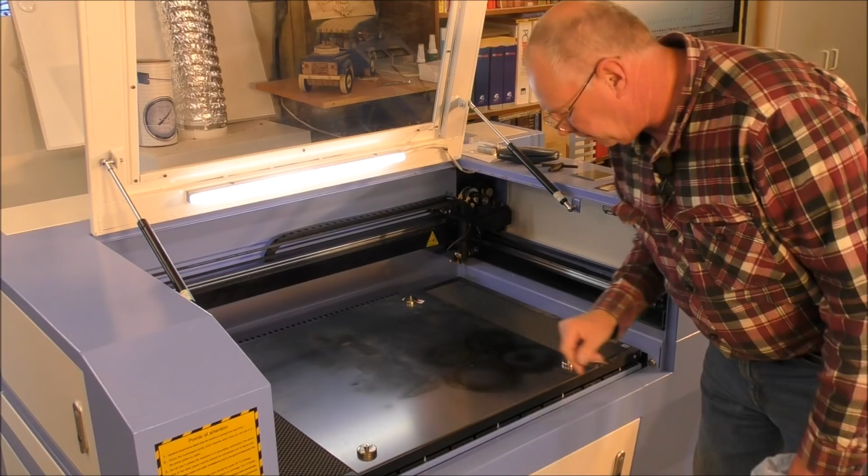You remember in the last video I showed you and explained to you why I have this black mild steel on here. Well, this is the reason. All this tar or residue that is left over from the burning or evaporation of the MDF, most of it's gone on here and condensed. Now if you didn't have this, it would either condense on your honeycomb, or it would be carried off into your filters, which gives you more work to do and added cost.

So you can clean it off very simply like this. Acetone. It's very gooey, horrible stuff too. But acetone cleans it off quite well. One thing using acetone, you've got to give sufficient time for the acetone to evaporate completely out of your machine. Otherwise, you could have an explosion because the laser can ignite the fumes.

So the first thing we need to do is switch the laser on and allow it to home itself, because we're going to then drive the Z down, put the fourth axis on, and then disconnect the Y and reposition it manually over top of the fourth axis. We'll then set the work offset or the work 0 point of the X, Y and Z on the work on the fourth axis. So it's automatically set the home position, so now I can drive the Z down and disconnect the Y.

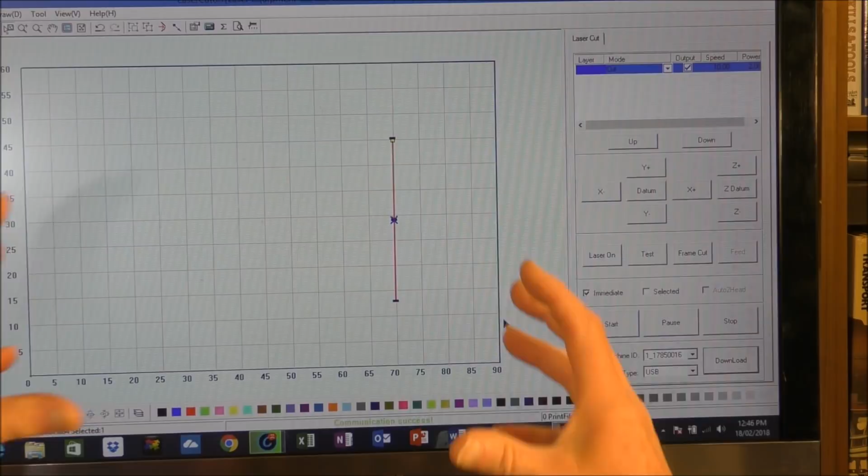So what I've done now, we have to configure the fourth axis to this machine. So I've drawn a single line that's 315 millimeters in length. That is the circumference around our vase. So we need to now match the driver to the stepper motor on the fourth axis. This is how we do this. You draw a line of the length of the circumference around the object that you want to etch, and I've set it to a speed of 10 millimeters per second, nice and slow.

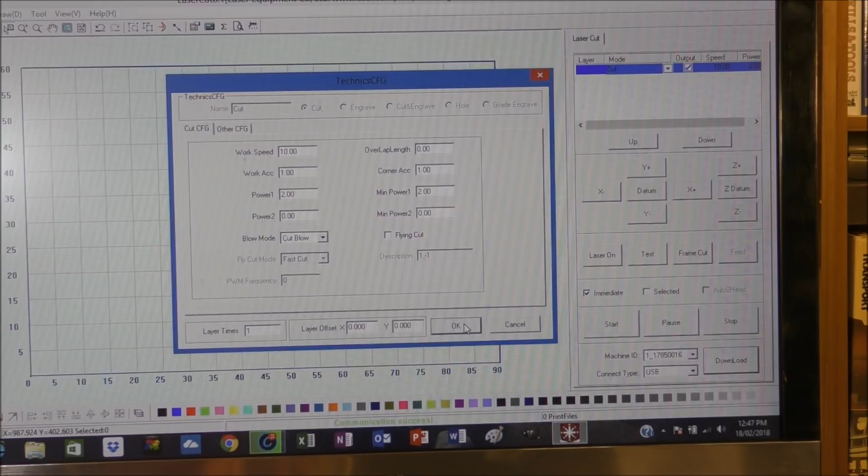So I set this down to 1%, 1%, 2%, 2%. I know the laser isn't going to fire, because we don't want the laser to fire. I'm going to OK that. And I'm going to upload that now to the laser. And there it is. So now we will run that file, and I'll put a marker on here to see how far the surface actually turns, to give us some indication of how much we need to alter this. So I'll just run that code now.

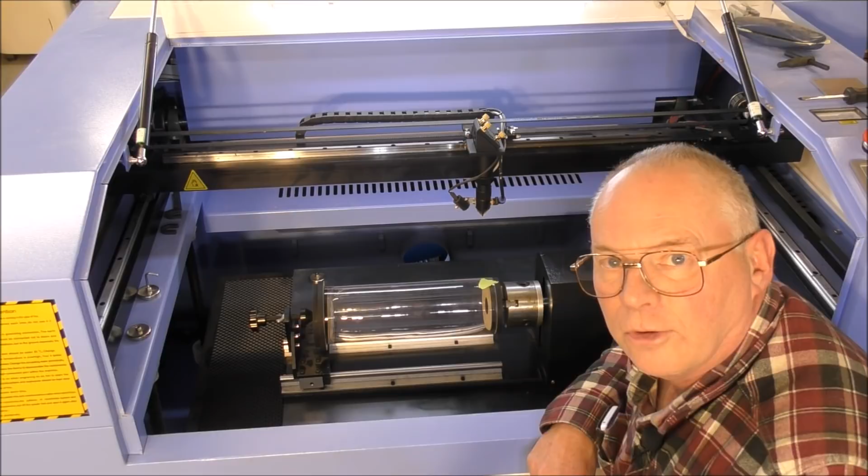3, 4. So as you saw, that was 4 1/3 turns, so it's way out. So whatever steps it is set at the moment, we have to be somewhere at 1/4 or just less of that.

Okay, now to alter any parameters within this program, which is the controlling mechanism for the laser, you come up to here, machine config, axes, y-axis, and this is the standard setting. Now take a photograph of this. In fact, take a photograph of all these settings, because you may need them in the future. So what we're going to do, double click. This lower figure is the one that we're interested in. Now this isn't going to be correct, but it's going to be a lot closer than what it is at the moment.

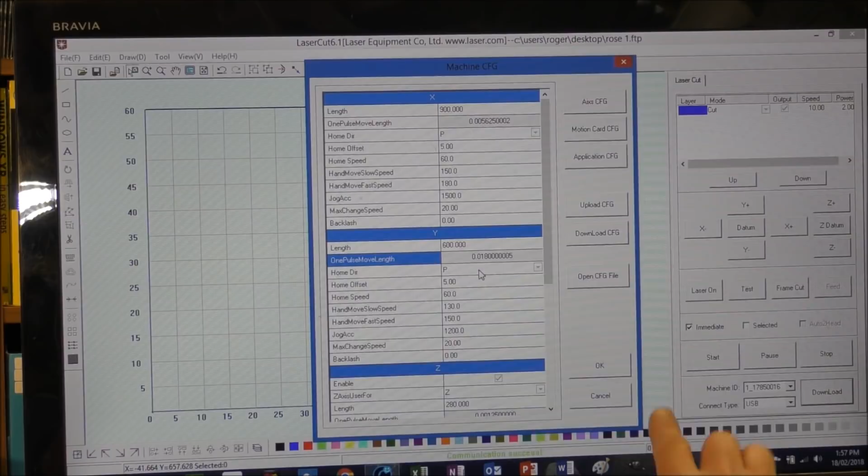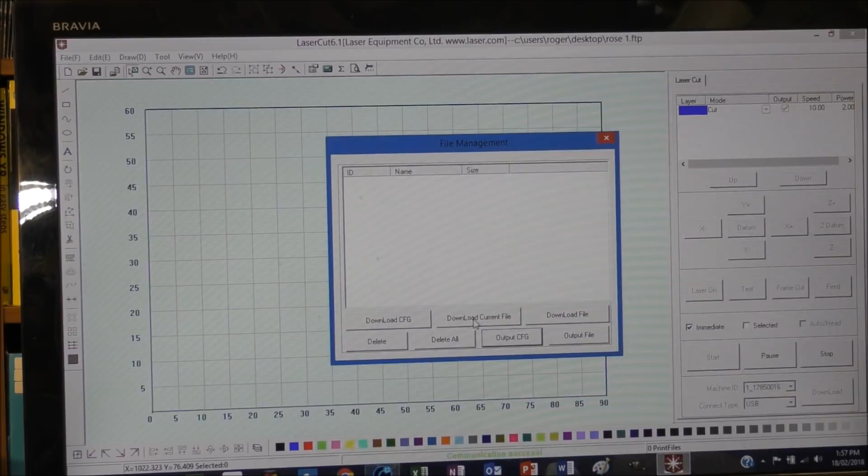I'm going to set this at 2000 pulses or steps, and press OK. Then you have to press OK down here, and also press OK here, and get out of this. Then double click and recalculate. Then send it to the machine. Okay, so now we'll go back to the machine and see what's happened now with the 4th axis.

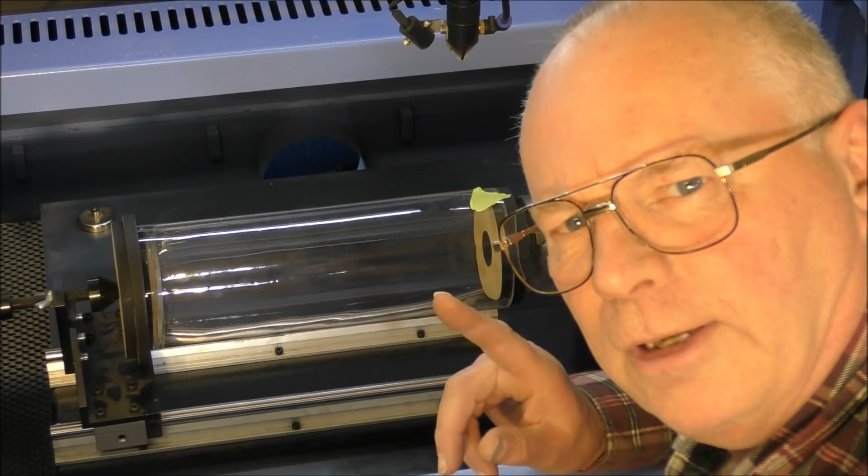Okay, so let's see now how many turns. That was about 1 1/3, or just over. So we know we've got to come down to about 1500 steps. That'll be pretty close, I think.

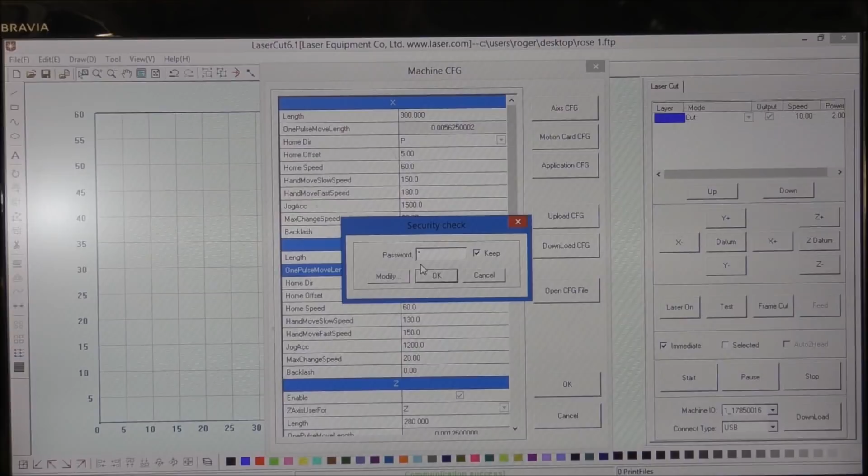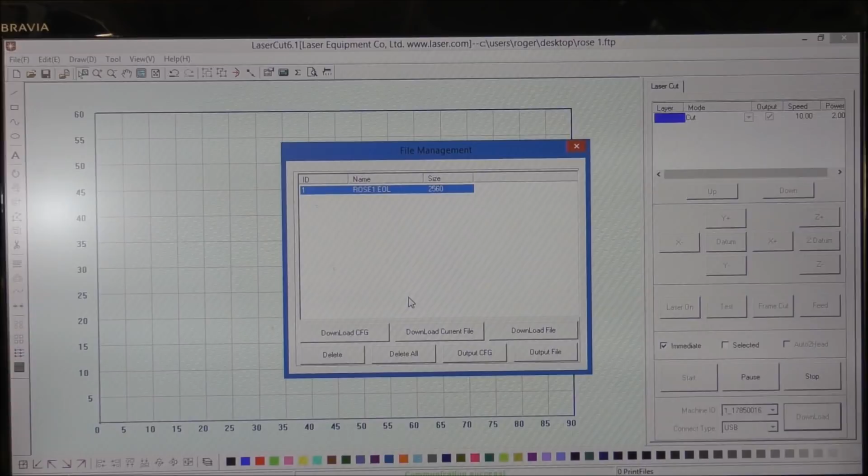Okay, so it's back into File, Machine Config, Axes, reopen this. Now I'm going to put 1500 here because, roughly working it out in my head, that's going to be pretty close, I think. OK, OK, OK, get out of that, double click and recalculate. So you can do this relatively quickly, it's not a big palaver to go through. Load it to the machine, yes. Now we'll go back to the 4th axis and recheck it. Okay, so here we go.

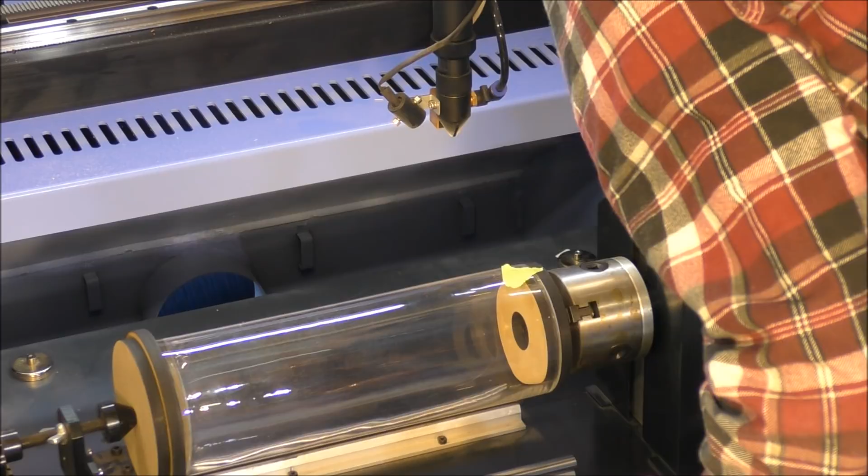Let's just recheck that again a bit closer. And that's pretty well perfect. And that's all you have to do. Just remember to take a photograph or jot it down on a bit of paper what the original readings were.

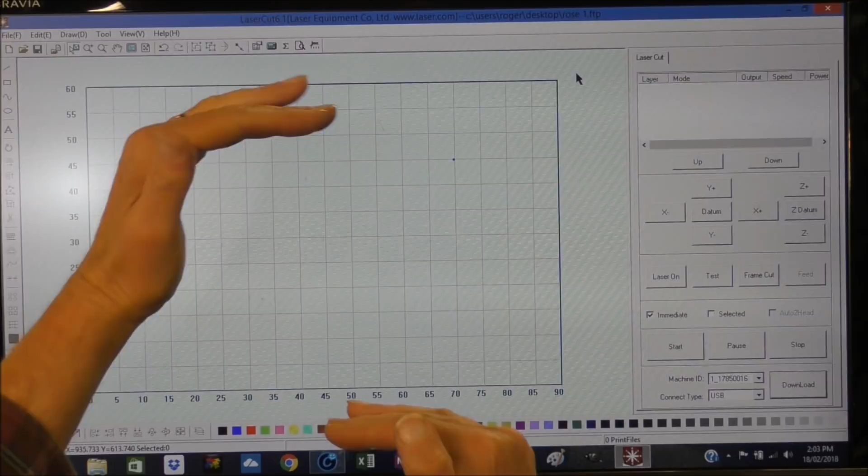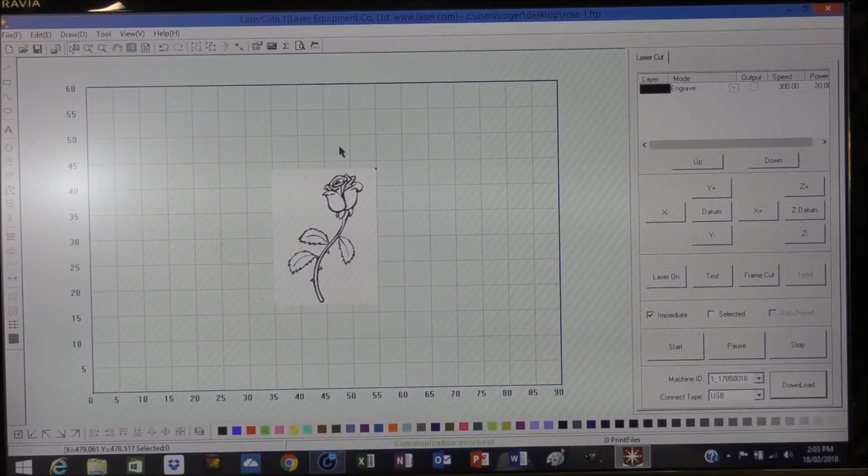Right, so to put this design together, I know that I've got 250 by 315 of surface area to machine or to play with. And then I've got somewhere here a drawing of a rose. That one there, I believe. That's quite a nice one. So we're going to reset. We're going to set the size of that one. So I want to put two on. I want to put one on one side and one on the other side. So wherever you have it rotated, you still have a rose.

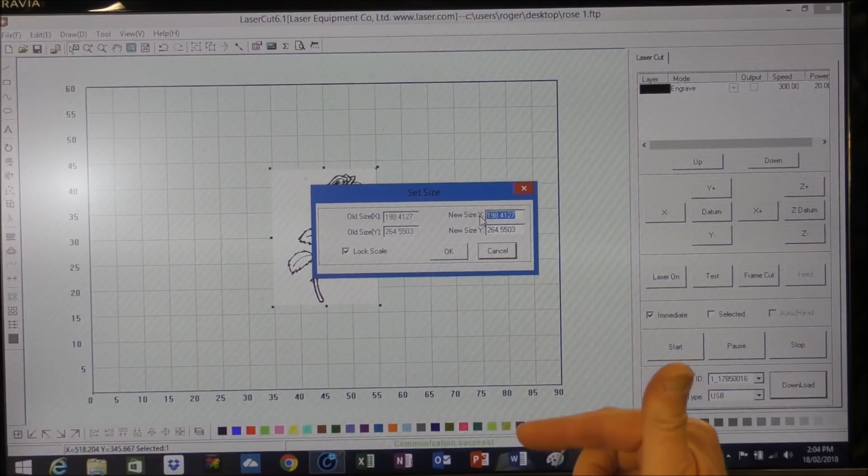So we need to keep the aspect ratio on, and it's the Y. This is the one we need to alter, because don't forget we're going to turn this around in a minute. So the Y, the actual X will become the Y. So that needs to be, let me see, we've got 315, so that's 157.5. 157.5. Lock the aspect ratio and press OK.

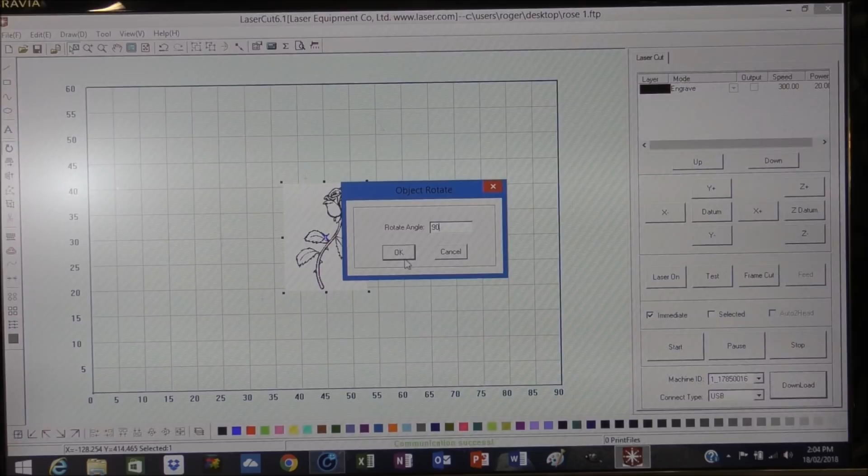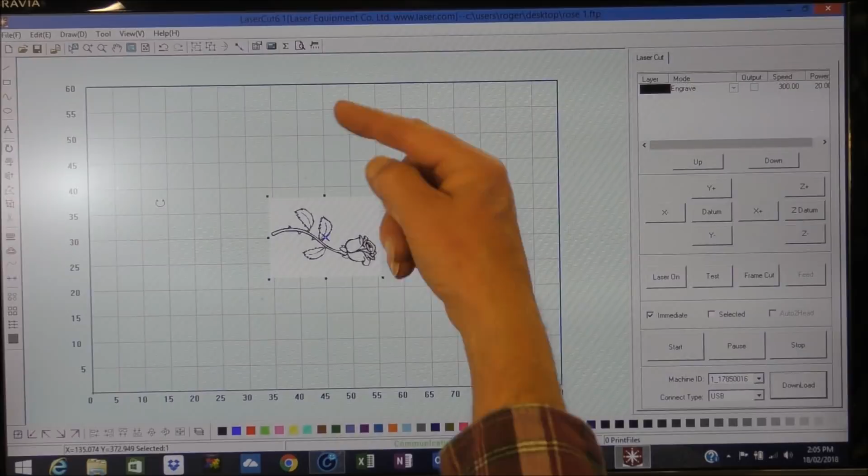Now then, we need to rotate this 90 degrees. 90 degrees. Rotate. Oh, we've gone the wrong way. So that's 180 to make it right. So we'll try that again. 180. That should put it right. Okay. Now then, we want to make two of these, because we want one either side. So it's copy. So we want two in the Y, but only one in the X. And we don't want any gaps. So there we go, and there we go.

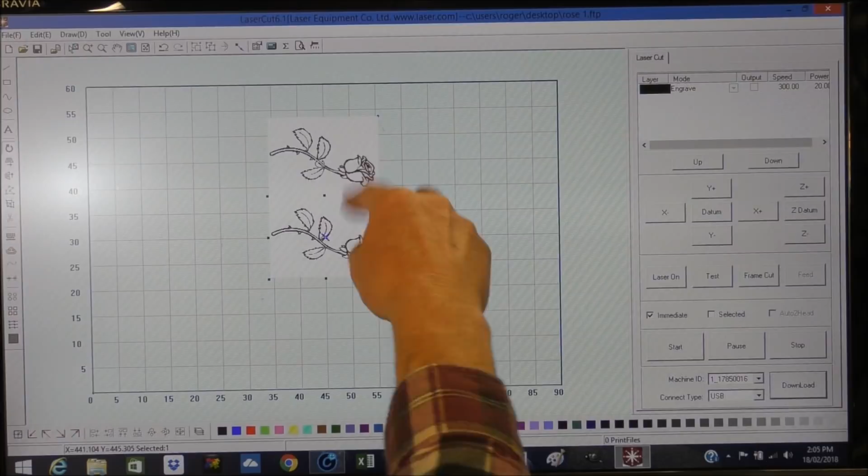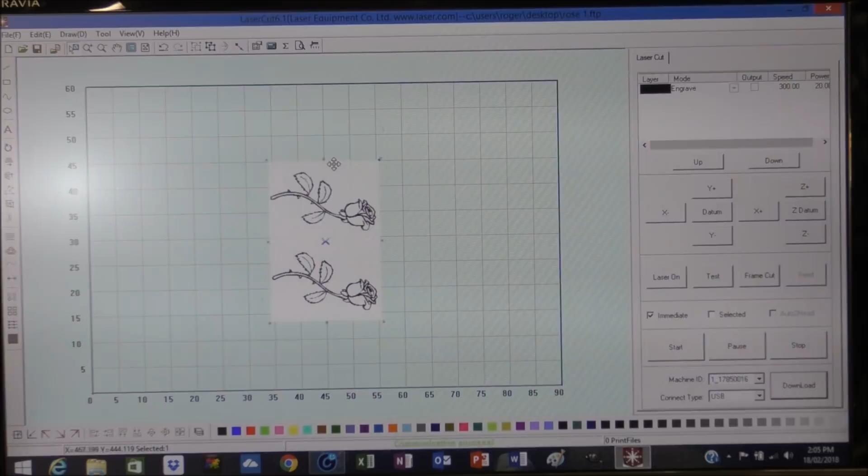So then what we need to do is group these two together to make it one unit. So you press Shift and then, first of all, we need that tool. Press Shift and that one. Then we need to group them together, which is up here. Group. So now that's one unit. Let's bring it down to the middle. Okay, so now we have a design.

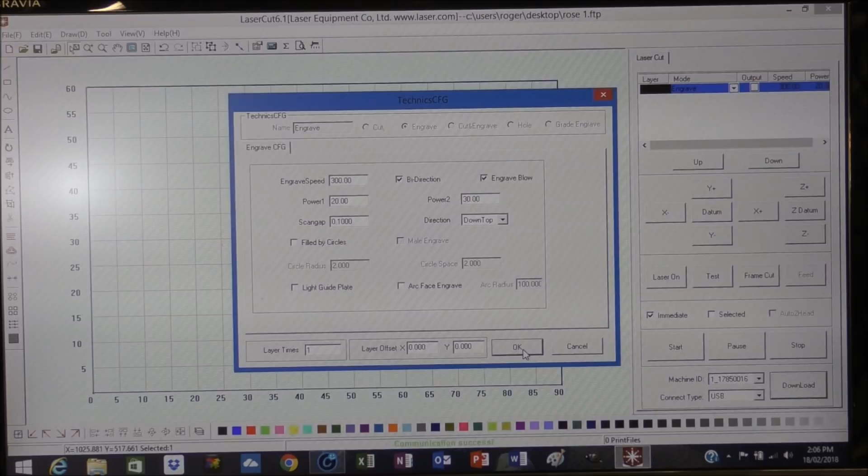So the next thing we need to do then is etch our design. So we'll bring up the etch in. 300, yes, this is fine. For etching on perspex or acrylic, this will be absolutely fine. Yep, we're going to OK that. And we're going to send that to our machine. And it's done. So let's set the fourth axis up now for machining.

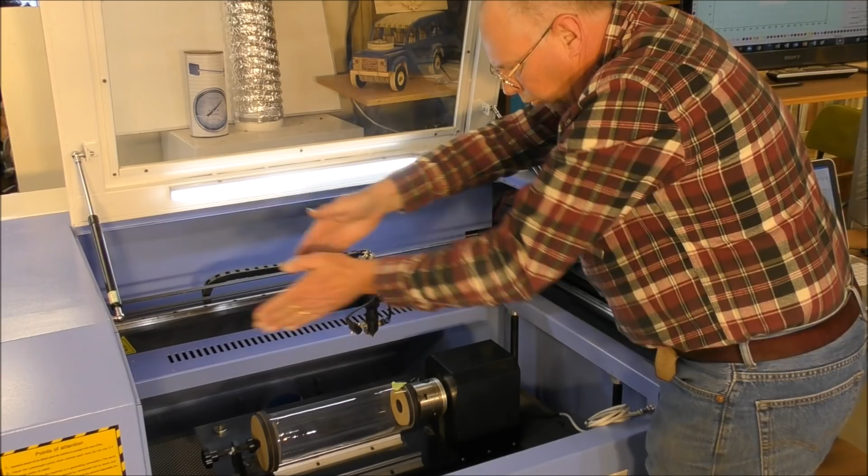What you need to do, you need to make sure that your rotary axis is parallel in the machine and parallel to this. You can do that because we have now the Y disconnected and connected into the fourth axis, and we have set the fourth axis up so it is now moving correctly at a measured amount. We can actually take this off, and we can bring this over. Now just sight down the body of the rotary axis, whether it's parallel with this. That's pretty good.

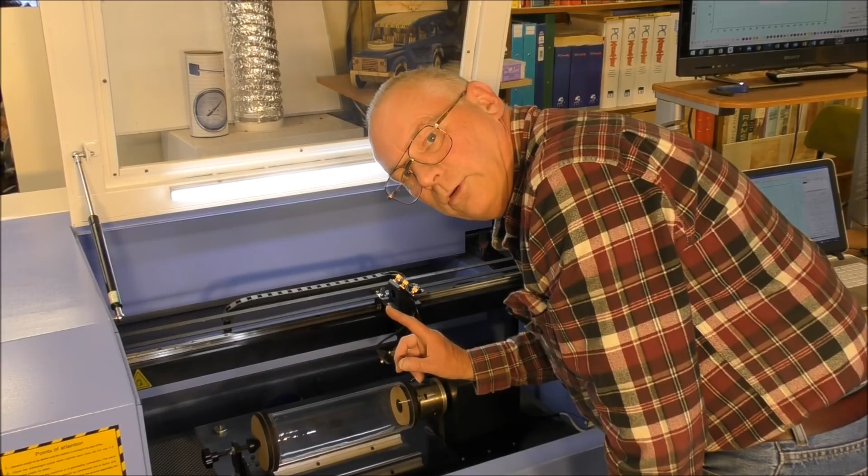And you bring this here. So the laser is directly over the top midpoint, which is there. So now the Y is set, but now we need to set the X and the Z. Now what we don't want, because this is going to be moving at quite a rate, we want to be sure it doesn't bash into any of these. So now we can set the Z.

Okay, so first I'll do a test to see whether it's within the envelope. Okay, I'm happy with that, and now we'll run the cut.

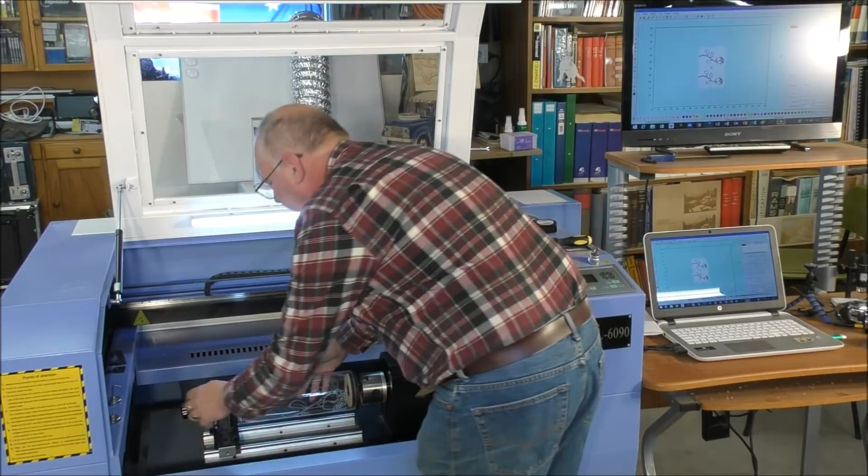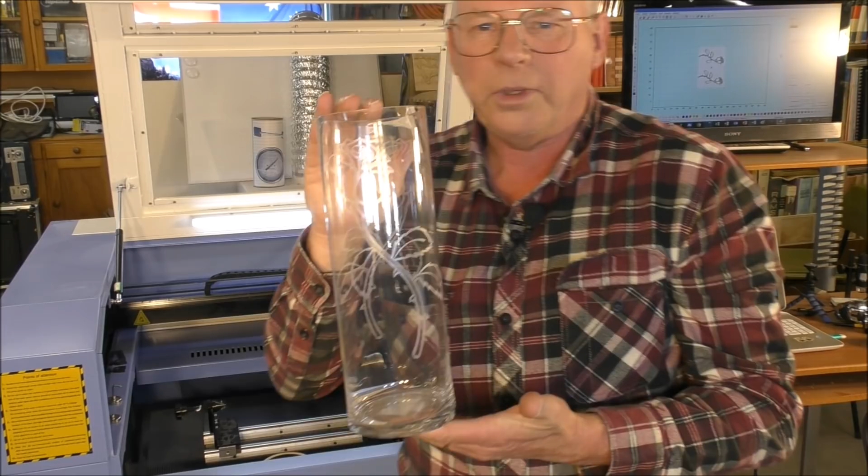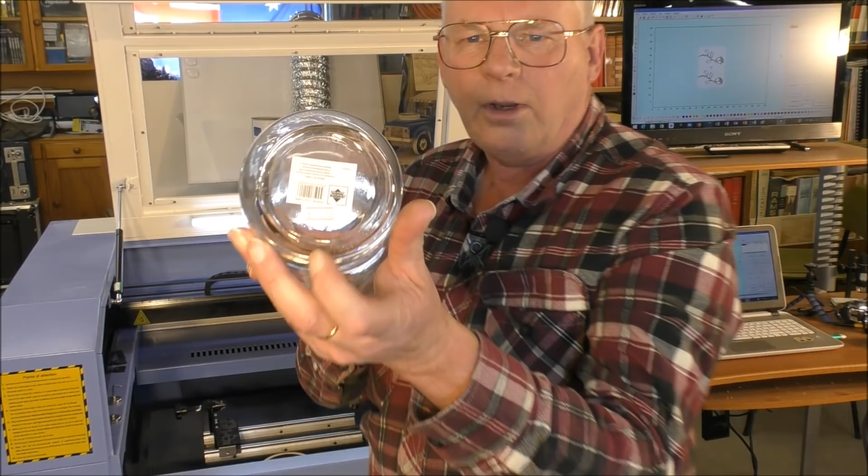Okay, so let's see what we have. That's what we have. I hope the light isn't too fierce in here. If I come a bit closer. Don't know whether you can pick that up, whether you can read it. I went to Kmart and bought this for $8.50. I've just put $50 on the value. And especially if you personalize it by putting something like happy anniversary and the person's name, and make it personal, you can earn yourself $50 in less than an hour.

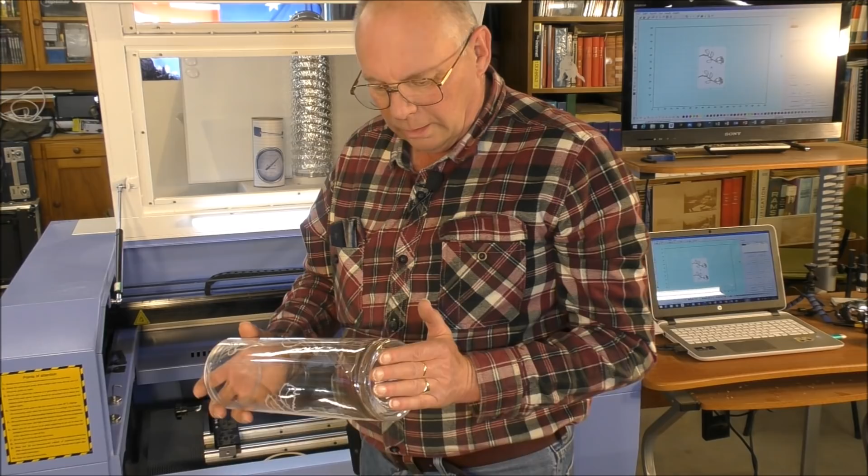I have also just seen a comment that someone made, I think it's America. And the comment was, where this side of NASA does an ordinary person have the money to buy a machine like this? Well, I'll tell you. What would you rather do? Would you rather you and the wife and the kids go on holiday for a week? Or invest in one of these and secure your financial freedom for the rest of your life? Because that's what these machines can do. They can make you a home business. If you set your mind to it, they're not that expensive.

And I think I've proved to you in videos past, and I will do in the future too, a simple thing like this. If you know how to handle the programs and set the machine up, you can buy it for $8.50 and turn it into $50 in less than an hour. That's good business sense. So I hope you've liked the making of this today on the 4th axis. Very beautiful little vase, I think now, from a plain vase.